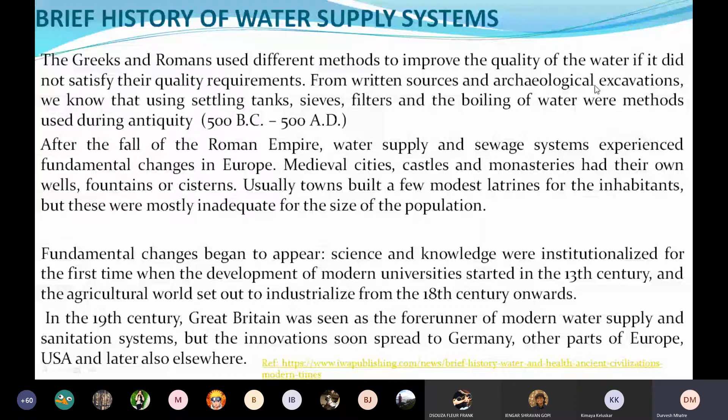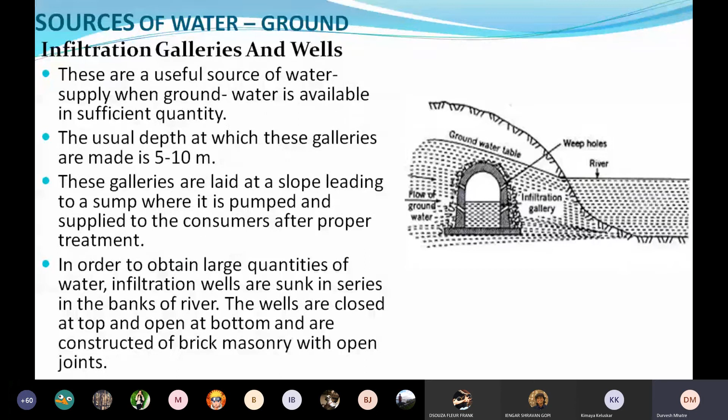Kimaya... yes, since you're talking about history, I think I'll continue with the history of Bombay's water supply, and then get back to the sources. Okay, I'll do that first. Whatever is comfortable.

Since we are talking about the history of Bombay's water supply, let's discuss the history of the water supply system in Mumbai and what the present system is all about. Then we will go back to the sources of water. I just have one reservation - to understand how the Mumbai water system has evolved, they might want to know the sources of water first, so that they could relate.

But we're talking about tanks, wells and lakes, so I don't think there is more to explain. Okay, fine, sure. Even the sources of water is just going to be a brief thing because I don't think it requires them to go into that depth and detail. Sure, sure, sure.

So let's talk about the water supply system of Mumbai. Earlier, when Mumbai was a very small place during the pre-British era, it was surrounded by sea on all three sides. So you had water resources that were small wells and collection tanks located in the South Mumbai region.

Now the increasing population meant that you had to provide some other alternative. So certain major tanks were constructed in Mumbai during those times. You all must have heard of places like CP Tank, Gowalia Tank.

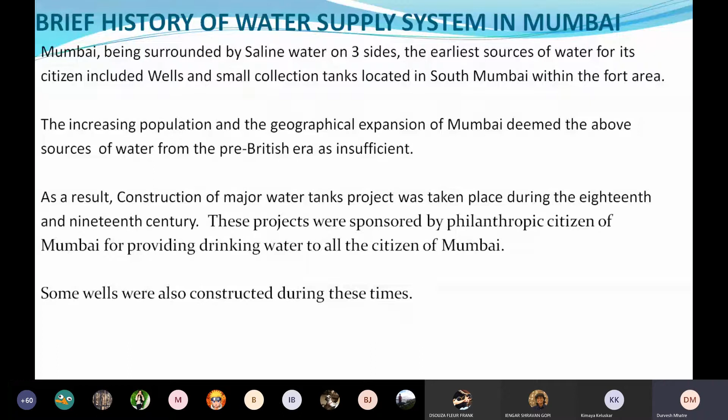These were tanks constructed during the 18th and 19th centuries by philanthropic citizens who looked after everyone's benefit. Then a pipe system was put in which came much later, and some wells were also constructed during that time. These tanks acted as the major source of drinking and domestic water supply for the citizens of Mumbai for quite some time, till about 1858 or so.

So we talked about drinking water systems in London and New York. They had a similar system of water fountains situated in Mumbai, erected to provide clean drinking water to citizens at strategic places, similar to those provided by the Romans, by those in London and New York. Water was never looked at as something that has to be charged unless it is piped, but for the public this water was freely and readily available.

We have public water drinking systems also. They are available at railway stations and various other small places for people to get free drinking water. The system of drinking water has evolved through these stages, where water is treated as a sacred commodity, something that says you should always give water to people who come to your place. No one should be denied water, and that thought which was prevalent during Roman times is still present even today, to some point.

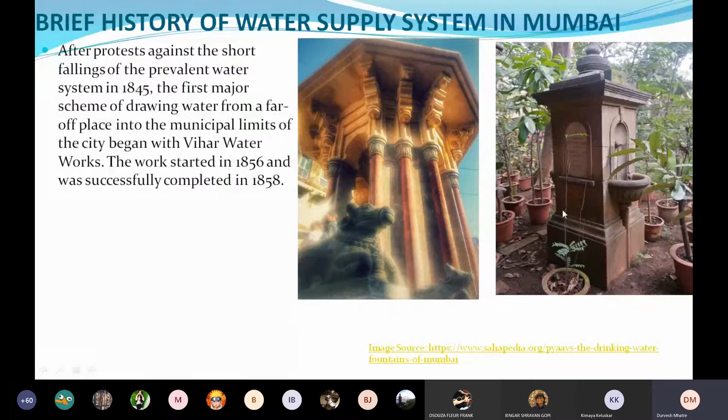Presently, water is supplied via these lakes, the seven major lakes situated in and around the vicinity of Mumbai. The Vihar Waterworks was the first project commenced during that time, and its height was increased subsequently. This was followed by the Tulsi Waterworks and the Tansa Lake projects, and subsequent other lakes were dammed for this purpose. A huge 32 centimeter circumference pipeline was laid between Vihar and the main city.

This pipeline was actually connected to these water fountains underneath. These water fountains were erected from around 1865 to 1950. They're still there, and there is a conservation movement going on in the city to save these water fountains.

They're called pia pios. What are they called? Pios, no. Pios or something, piaus, piaus. Pios, yeah, pios, I can never pronounce it. I think it's a Gujarati or Rajasthani name, not a Maharashtrian name. In Marathi it's called a pyau, pyao, piau, I always get confused between the names. It's not a Maharashtrian name, it's called a pyao but the name origin is in Gujarat or Rajasthan. It's piau, and in Marathi we call it piau.

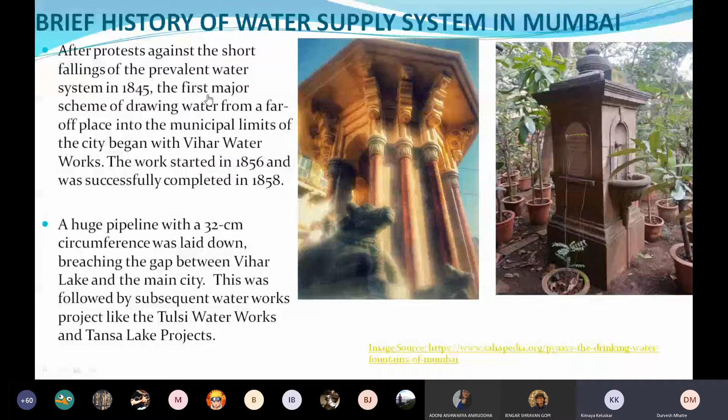I have to talk to Rahul Chemburkar again because he does a lot of conservation of these pyaus. You know Rahul Chemburkar? By the way, they're doing masters together, if you didn't know.

So these were the tanks that were present in Bombay, in Mumbai, at that time, out of which only the Banganga and Bandra tank are still in existence.

Kimaya, can you unmute yourself? I am unmuted, you want me to mute myself or unmute? Sorry, mute yourself, your clicking is interfering with mine. Oh, I was sorry, I didn't realize this thing works on responding to the chat. Okay, if I didn't have to click, I had no problem with it.

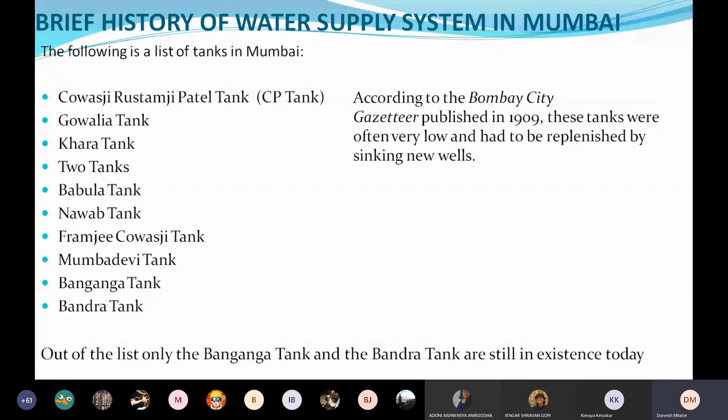Now, since the water pipe system came into Mumbai, these tanks were considered unfit for human consumption because they acted as a breeding ground for mosquitoes, and since they were open and difficult to maintain, they would get polluted very fast.

So hence they were filled in. You all have seen the August Kranti Maidan - is everyone aware of it? So that area is called the Gowalia Tank, and the entire thing was filled up to create a Maidan over there. Many people must be aware of the history of Mumbai - that is the tank, CP tank area. There is some building over there, the Framjee Cowasji tank, which has a building.

So this is how piped water came into existence in Mumbai, after the commissioning of the Vihar water works and subsequent other lake projects. We shifted from a groundwater based drinking provision system to a system of tapping water at a source that is far away from the place where it is required, and using pipes, or as the Romans had aqueducts, to get water from there to the area of consumption.

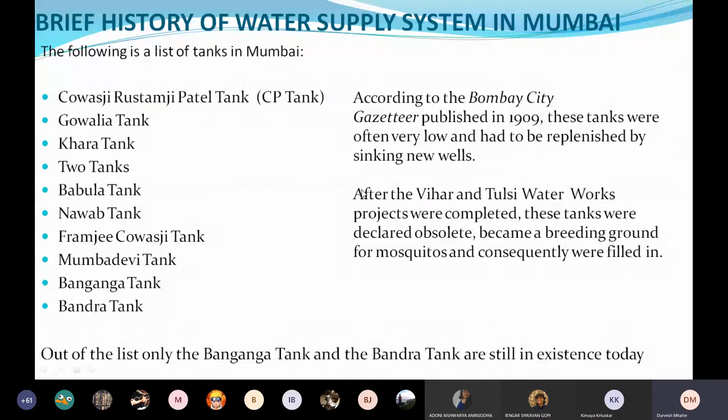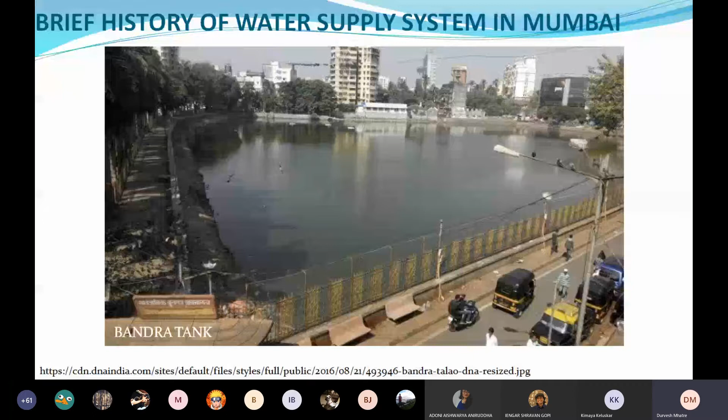So when we talk about a pipe water system, it now involves three basic components. That is the collection that happens at a source. The collection place is very important - it has to have a larger catchment. For example, valleys in hilly regions have to have a larger catchment for you to build a reservoir or to dam the water of an existing lake or water source. Then you have to get that water to a purification plant to filter it and make it potable, and finally you use a system of distribution to take it to the individual user.

During earlier times, the Greeks and the Romans didn't have an immaculate process of filtration. What they did was let the impurities settle at the bottom, or they boiled the water. The level of turbidity played a very important role in determining whether the water was potable or not. So they used their sense of smell and taste to a considerable extent to distinguish between potable and non-potable water. Water might appear clean in a lake or pond, but it might not be potable.

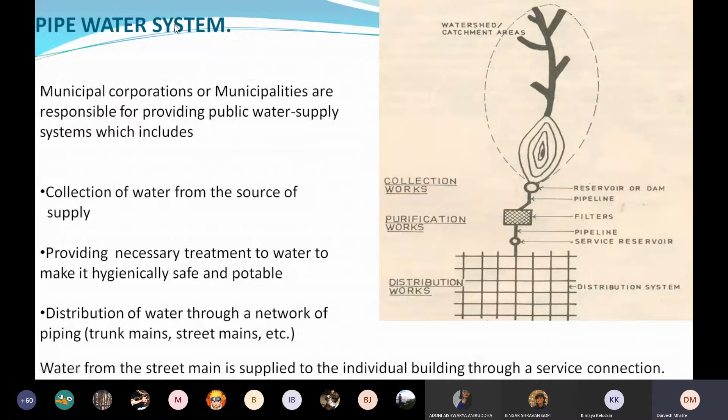So now, when we are using a pipe water system, we install these purification plants, these filters, these areas where we can actually remove the impurities and make it as potable as possible for the end user. So we have two such plants in Mumbai, in and around Mumbai. One is in Mumbai.

Same thing, it just kind of reiterates certain points. Kimaya, are we giving them these presentations for reference, so they get the recordings of it? Eventually they will see the slides of it. Okay, but are we presenting it to them? No. Giving it to them by email or something? It's at the discretion of the faculty actually. Okay cool, most of the faculties are not doing so. So I don't know, let's see.

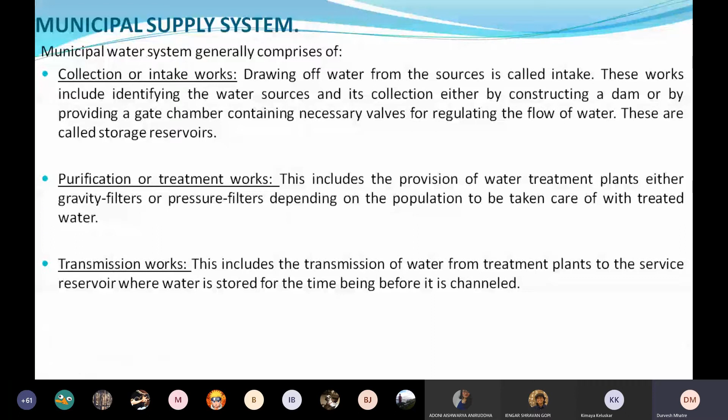And the last is the distribution system, where the distribution system comprises the distribution of water from the service reservoir till it reaches the consumer end. Now, so the purification - there is another step in purification. There's one small step between purification and distribution, that is transmission, where this step depends on the population and how much it has to cater. In Mumbai, we have a transmission system at a place where the water is stored in service reservoirs. Going back, the three main things are intake or storage, purification, and distribution, right?

Keep it simple, it's pretty clear. Now this is what happens in Mumbai.

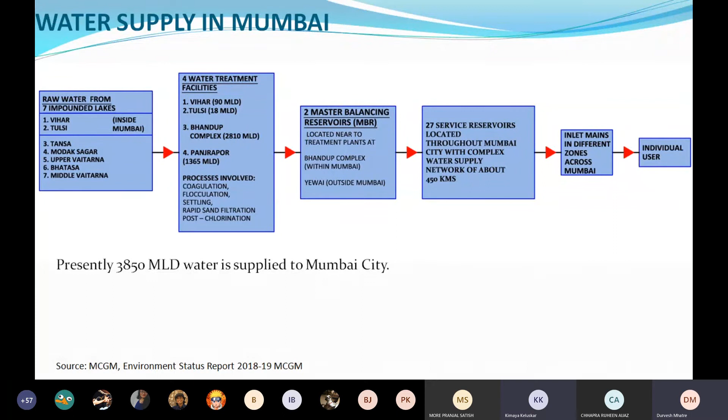I can't see the screen. Now it's coming, it's loading.

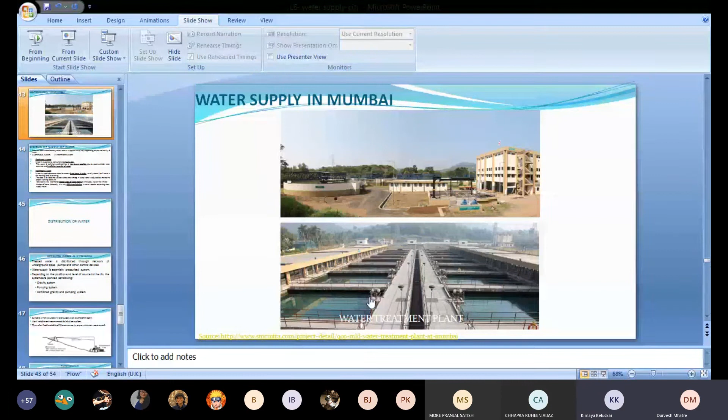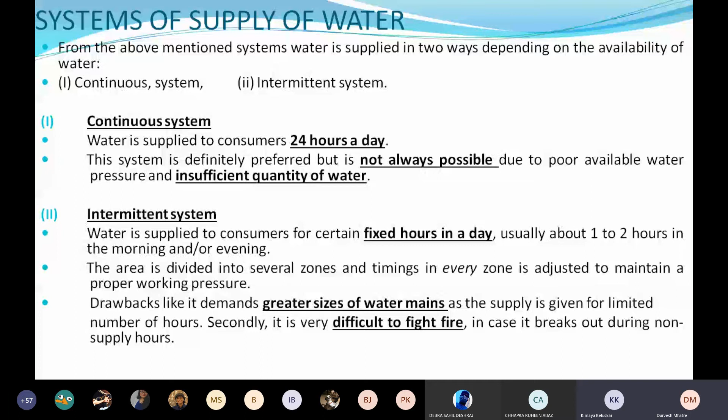If you understand the entire terrain and even the urban rivers, what has happened over a period of time, whether you take the Thames in London, the Kallang River in Singapore, or the Seoul river in Korea, or our rivers like Mithi and Dahisar, they have a certain kind of pressures they are exposed to as cities evolve, and the major pressure is encroachment.

So generally, if you understand river ecology, you will always have a blue line, a red line, and a grey line.

The blue line is the water extent within the river. Then there is the red line, which is your high flood line — in certain flooding scenarios, the water will come to that extent. The area or land that lies between the blue and red line should be kept or secured as a buffer space, and that buffer space is nothing but your riverbeds, or floodplains, as we call them.

Then comes your grey line, beyond which a certain kind of construction can happen. They generally say that 30 meters beyond your flood line, which is the red line, you could do construction.

But most of you must have encountered the rivers across, and you guys must have also seen that there is no such red line, blue line, and grey line in Mumbai. What you see is that half of the buildings are actually built within the floodplains of Mumbai.

What happens is these are actually mediums through which the surface discharge or runoff, and also your sewage discharge happens. But before you pour them into the river, you have to treat it to a certain extent.

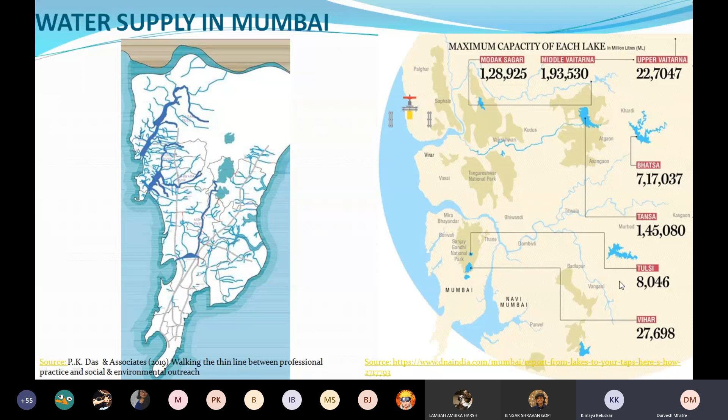That was Ambika. Ambika said it got a little information heavy - we've taken a lot of notes, so I don't know if anybody wants to continue right now. Aishwarya is also saying there's lots to digest.